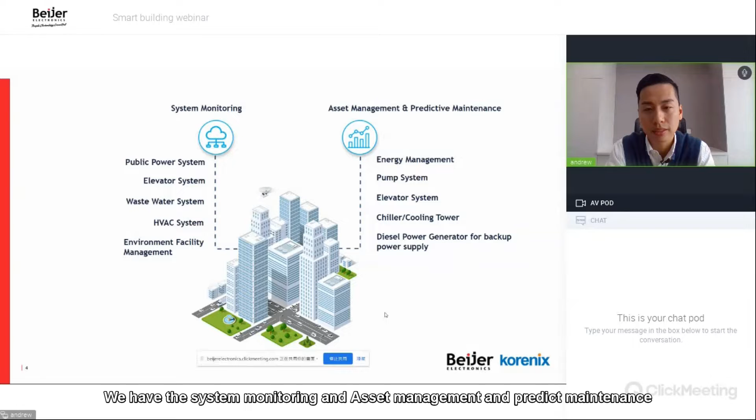Nowadays, every new building or new infrastructure not only needs the system to be green and useful, we also need to monitor it. So we need a lot of data to log in and log out, and to provide this data for more specific predictive maintenance. This way we can have many different possibilities for accessing a more reliable system and more reliable city assets.

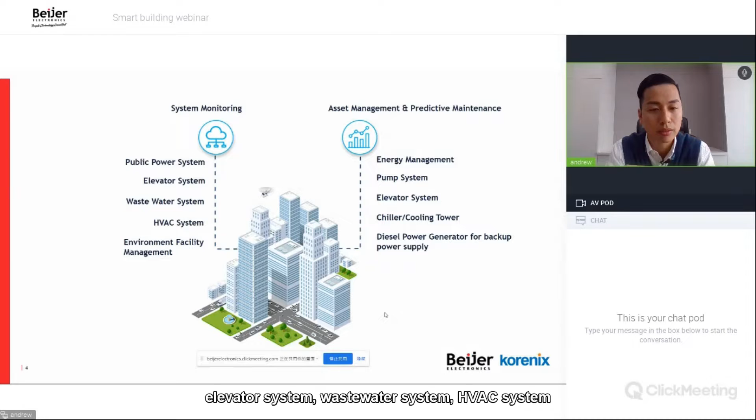For system monitoring, we have public power systems, elevator systems, wastewater systems, HVAC systems, and environment facility management. For predictive maintenance, we have energy management, pump systems, elevators, cooling towers, diesel power generators, and so on.

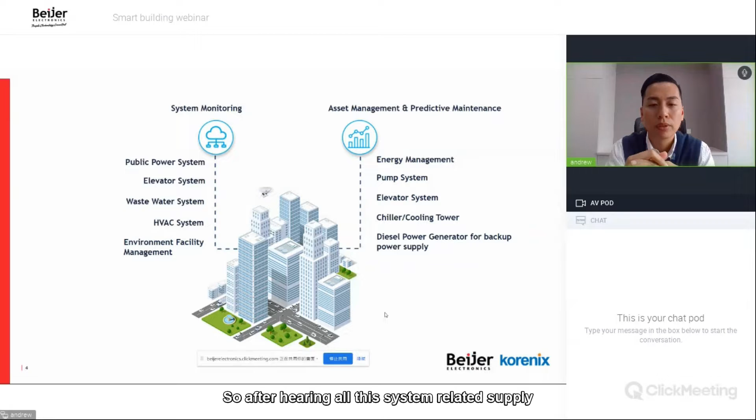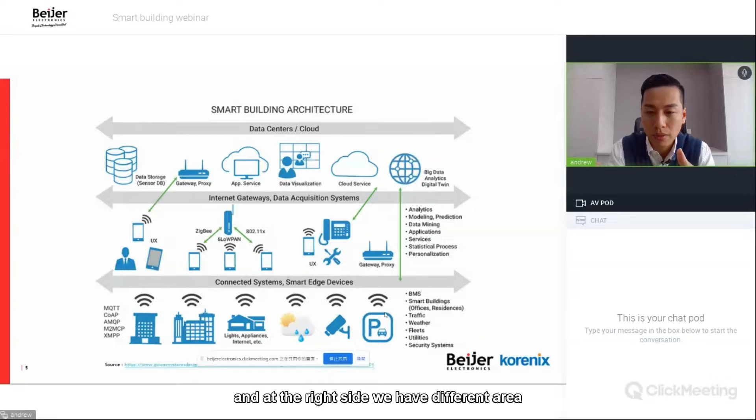After hearing about all this system-related information, this slide introduces our different structure. At the bottom, we have the connected system and smart edge devices. In this area we have many different tools to help us, like MQTT, CoAP, and so on. On the right side, we have different areas like smart building, traffic, weather, utility, and so on, where we provide many sensors to collect data.

On the second layer, we have many different gateways to connect to the cloud, which is the first layer that can provide interaction to turn that data into not only raw data, but very useful information for the user. Users can use their own devices - cell phone, tablet, or notebook - to access the data center and know what's going on with the building and application.

Nowadays, not only cell phones but many devices can use Wi-Fi, Zigbee, LoRa to access these applications. Beijer Group and Korenix have many solutions for data visualization and cloud service. For the gateway, we have Wi-Fi gateways, cellular gateways, and some private LoRa gateways.

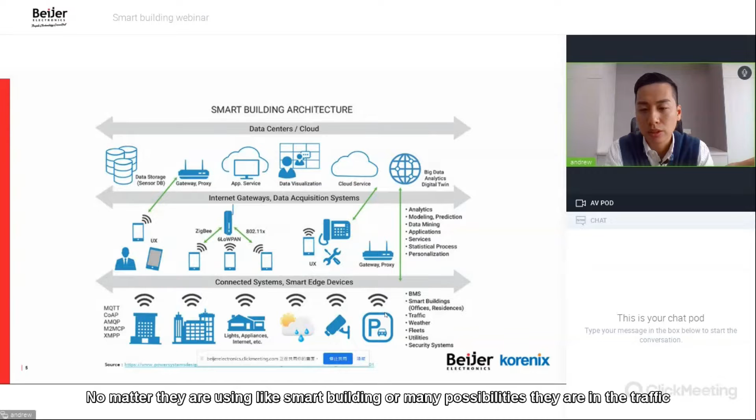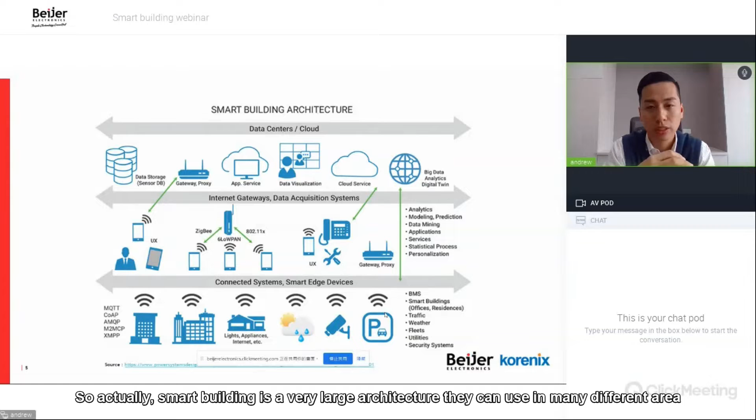So we can help your client complete the smart building architecture, no matter what kind of application it is, whether they are using smart buildings or many other possibilities such as traffic. Smart building is a very large architecture that can be used in many different areas, so from different angles we can help our customers fulfill the bigger picture.

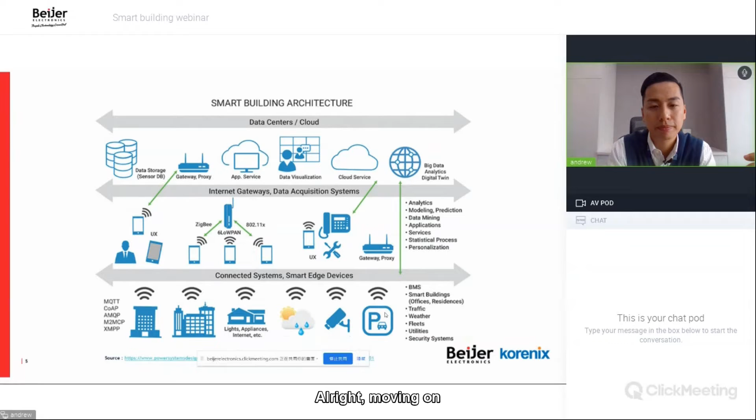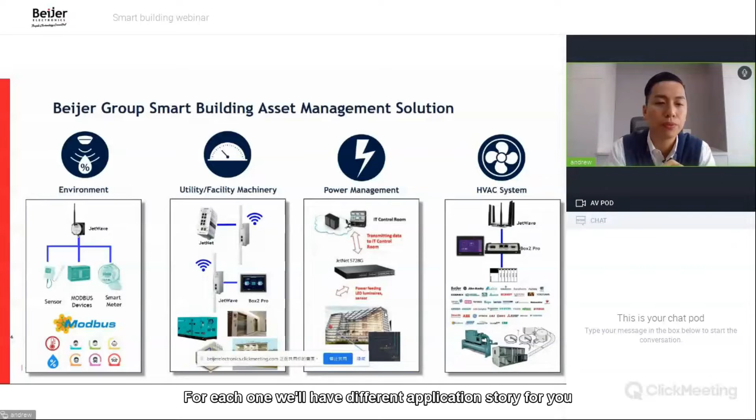For environment, they usually have plenty of sensors, Modbus devices, and smart meters to get data like temperature, water status, or toxic materials. For utility, we provide Wi-Fi gateways, Wi-Fi IP gateways, which can connect to the Box2 Pro, giving different solutions for utility. Then for power management and HVAC, we will have more slides in a moment.

Moving on, the first will be the environment monitoring. This application is in China, and it's used for port street light control and temperature monitoring.

For this solution, the end user is using solar panels around the port street for the LoRa devices, because they require very little power input, so we can use the solar panel to power the LoRa devices, along with the sensor for the street light and the temperature sensor. In that case, our customer doesn't need to equip extra power lines.

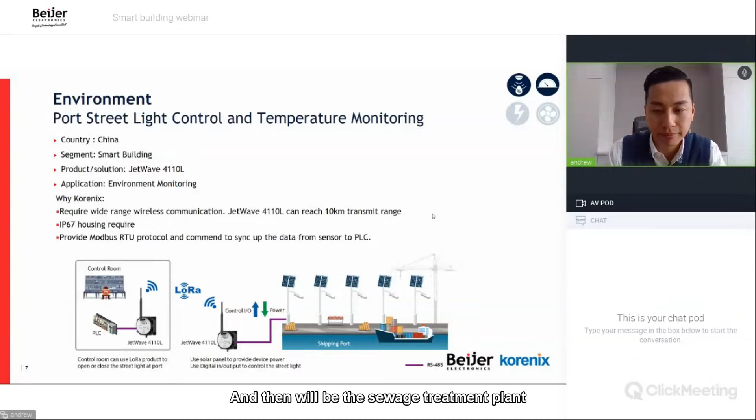Moving on to the sewage treatment plant, located in Taiwan. There are lots of heavy machines in the whole plant, and it's not just for a single building, but for the whole plant, with 10 or 12 buildings.

Some of the buildings are open areas, some are underground. So in order to have the whole plant covered with Wi-Fi, we needed to go to the field site and estimate what kind of devices, Wi-Fi, and antennas they require to provide the whole plant Wi-Fi solution.

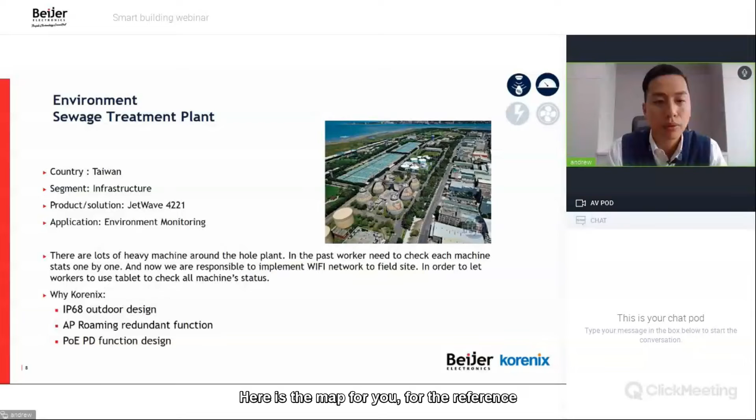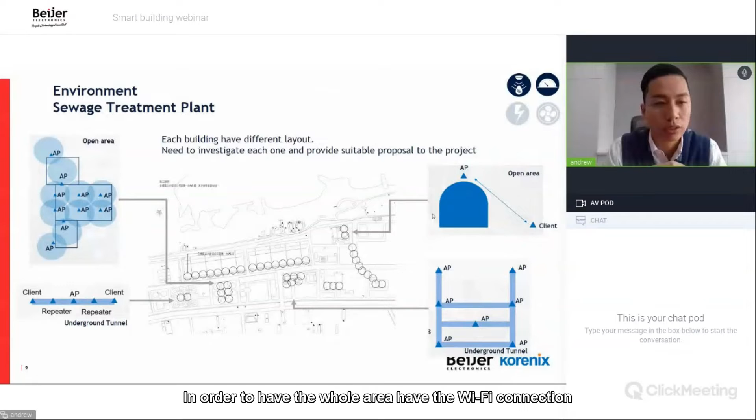Here is the map for reference. In order to have all areas covered with Wi-Fi connection, some open areas use an omni antenna for the client that can cover the whole area.

Some areas, like underground tunnels, required us to set up our Wi-Fi devices in different modes, some with client mode, some with repeater mode. For each one, we studied what kind of distance there was and what kind of mode they needed.

Because the workers there need to use tablets to walk around the sewage treatment plant, with the Wi-Fi solution they can use the tablet to access all the machinery data and status to understand what is going on at the field site.

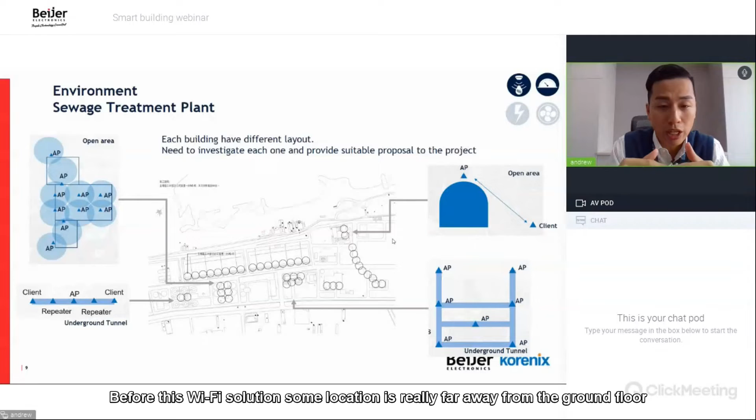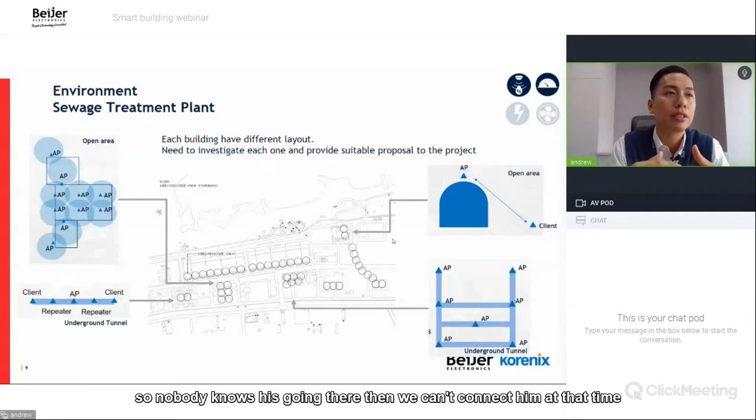Before this Wi-Fi solution, some locations were really far away from the ground floor and sometimes dangerous, because in the past workers passed out inside the tunnel. In that area there was no cellular networking, so nobody knew he was there, and we couldn't connect with him at that time. After a while, when other people found that guy, it had already been maybe an hour, putting him in a very dangerous situation.

After that accident, the whole sewage treatment plant decided to have this kind of all-area Wi-Fi coverage, so no matter where the worker is, the central control room can follow his location and know whether he's still moving or not, and what his status is.

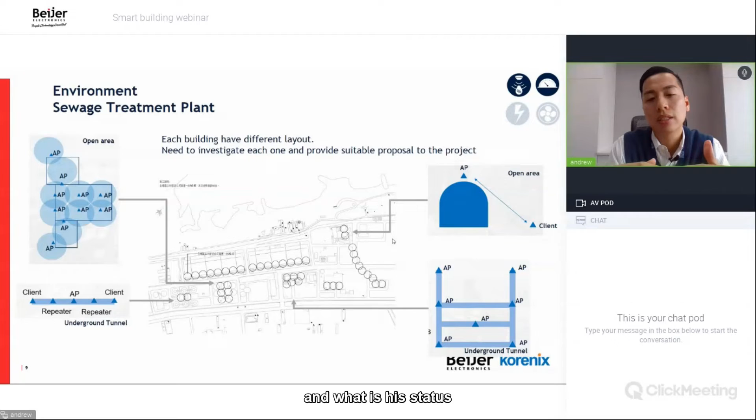So this is another successful story allowing all the workers to be monitored at all times, along with all the machine status.

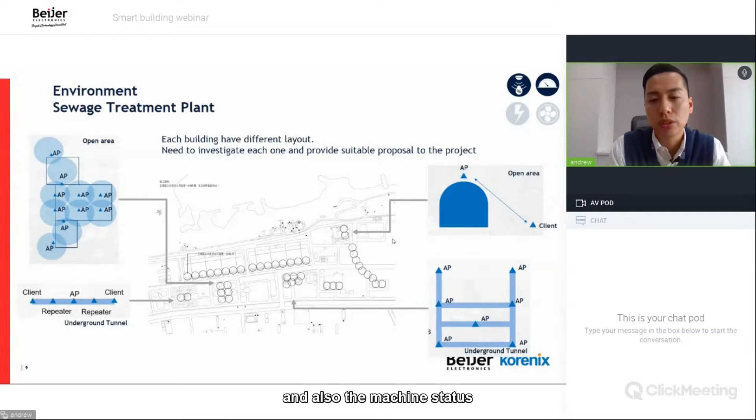Moving on, we have the utility and facility machinery application, located in China. This is a factory that produces many medical pills, and in different rooms, workers have different carts moving around. These carts input the pills and show the quantity, size, and machine status.

We have the X2 Pro 12 equipped on the cart, so the workers can actually see what's going on and what the status is on the X2 Pro.

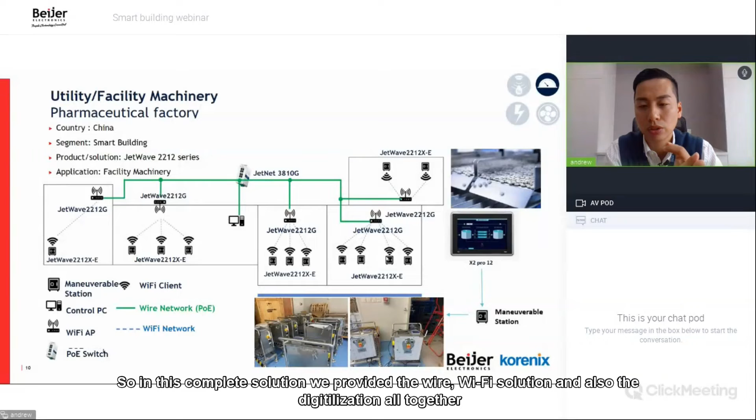And also by our Wi-Fi solution, the JetWave 2212X and G, we have the Wi-Fi client also equipped on this cart, and we have the Wi-Fi AP located at the top of the room, and we also use our PoE switch to connect to our Wi-Fi AP. So in that case, the end user doesn't need extra power lines or extra cost to equip that. In this complete solution, we provided a wired solution, a Wi-Fi solution, and also the digitalization solution altogether, and the customer required a very slim design device, whether it's the Wi-Fi client, Wi-Fi AP, or the PoE switch.

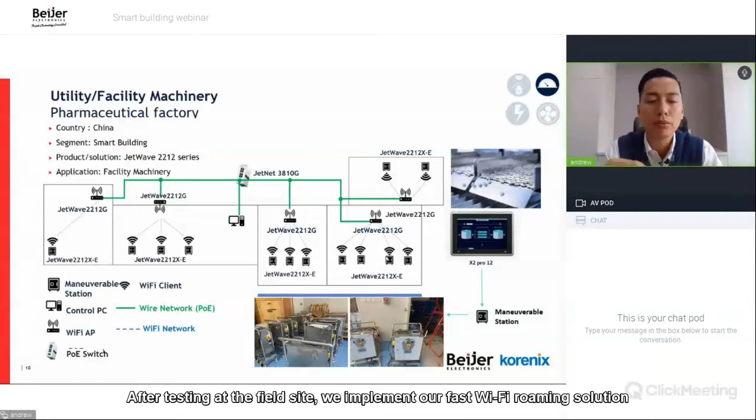So in this small area, we chose our very slim product to fulfill customer demand. And for each room, because this cart will be moving from room A to room B to room C, they also require very smooth Wi-Fi roaming quality. After testing at the field site, we implemented our Wi-Fi fast roaming solution, and for this area we can achieve the roaming time under 15 milliseconds. So the customer is very satisfied with our Wi-Fi performance, and everything goes very well with the X2 Pro.

So right now, it's not only in a single building, but also in different areas. The customer already implemented this in two buildings in 2021, and right now they also have another 5 buildings and a factory in 2022. So this is another successful story for the smart building.

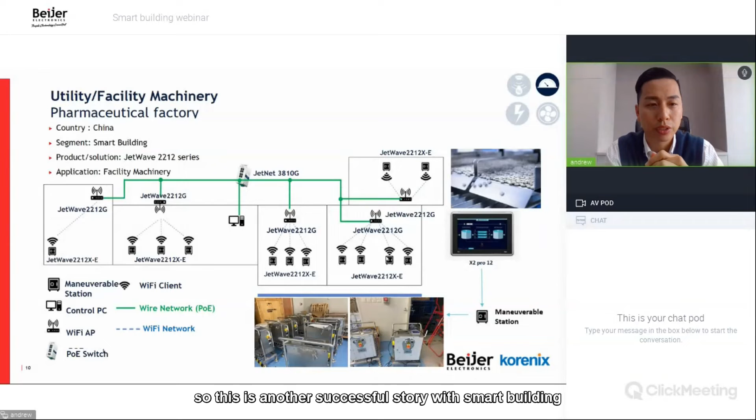And next is the power management. This power management system is located in Netherlands, in Amsterdam. And in this building, there are over 6,000 LED lights, which connect to the PoE-fed LED luminaire sensor. With this sensor, it can control the LED light.

How can the customer achieve that? They chose our Korenix JetNet switch, which has 24 PoE ports to connect to those LED sensors. Our maximum power capability is 720 watts, and it's very stable and reliable, so the IT control room can use this recommended switch to control those sensors and LED lights. So we can achieve the building power management. This is a smart building in Amsterdam.

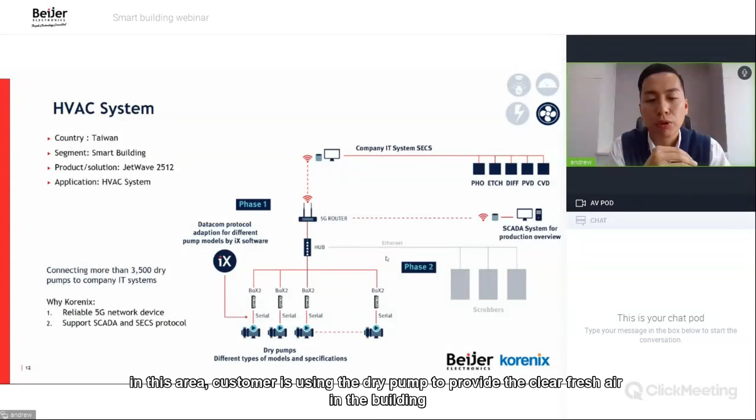Then we'll have the HVAC system here. It is in Taiwan, and we have the BoX2 base and JetWave 5G cellular router together. And in this area, the customer is using dry pumps to provide clear, fresh air in the building.

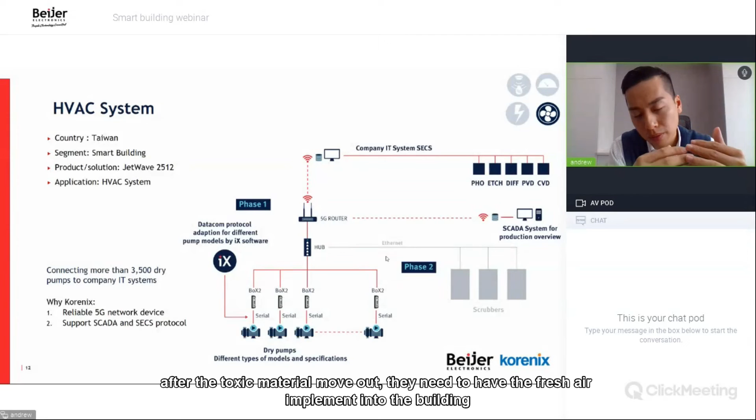In this case, because it's a very large building and there's plenty of toxic material that needs to be moved out, after the toxic material is moved out, we need to bring fresh air into the building. So in that case, we have over 3,500 dry pumps in this area. How can we control and monitor this dry pump? By using our BoX2 connected to the serial port of those dry pumps, using the SECS protocol to control that.

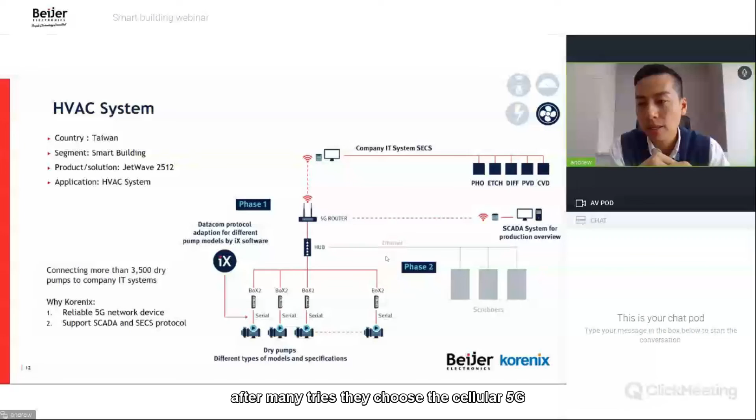And in this case, because there is plenty of machinery, at first the customer tried to use Wi-Fi and tried to use Bluetooth, but there was too much interference. So after many failed tries, they decided to use cellular 5G. But actually, they chose private cellular 5G. They bought their own base station from the telecom company, so they can manage their base station on their own, connected to our JetWave 2512, which is our Korenix first 5G product.

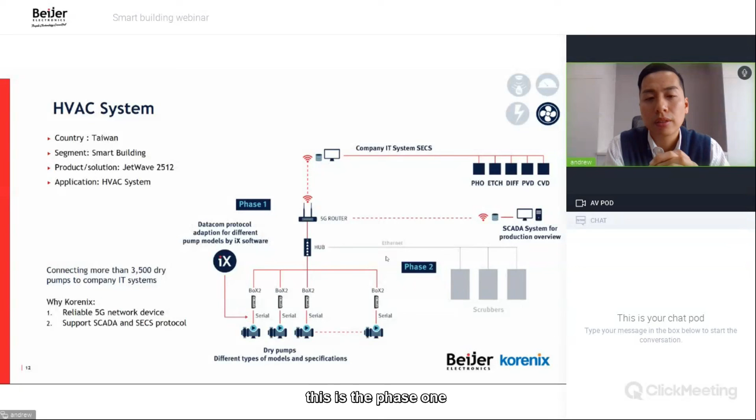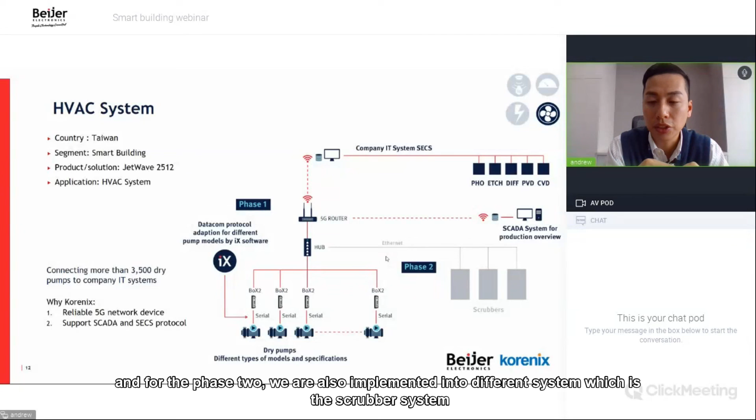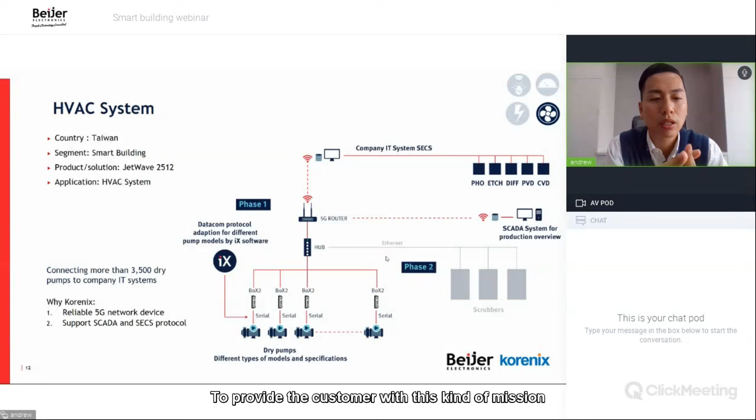In that case, the central control room can see all the Box 2 status with the cellular 5G product from the central monitoring, central IT system. This is just phase 1, and for phase 2 we are also implementing a different system - it's a scrubber system. So in this building, for the HVAC system, we can combine the Box 2 and Korenix 5G router together to provide the customer this kind of solution.

All right, so above are the smart building asset management solutions from Beijer Group. We have port monitoring, sewage treatment plant, pharmaceutical factory, power management, and HVAC system. And if you have any questions, or want more detail...